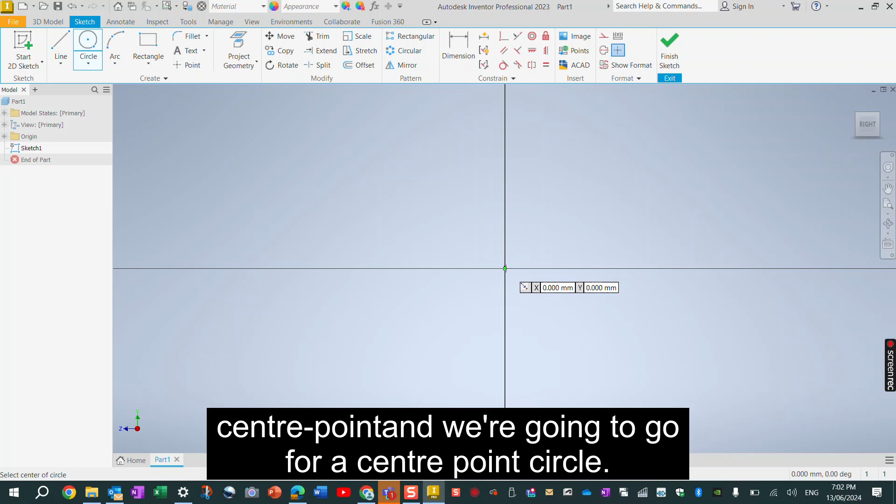Okay, we're going to make the wheels. So new part, standard metric. And then we want to start a new sketch. This time we'll take the right hand side face and we're going to go for a center point circle. So let's go for that.

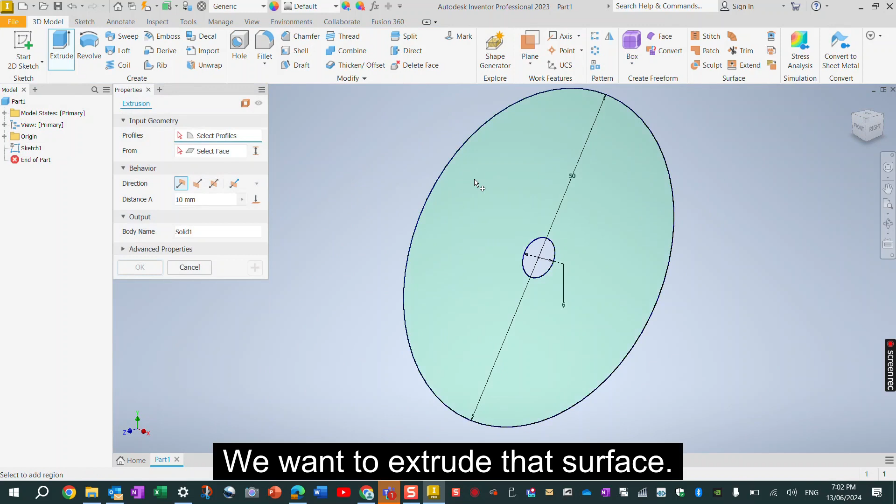They are 50. That's the outside of our wheel. And we've still got the circle function, so we can do another one. That's 6, and that's for our axle. So let's extrude that. And we want to extrude that surface. We've got two surfaces here. So we'll just extrude that one because that's just going to be a hole.

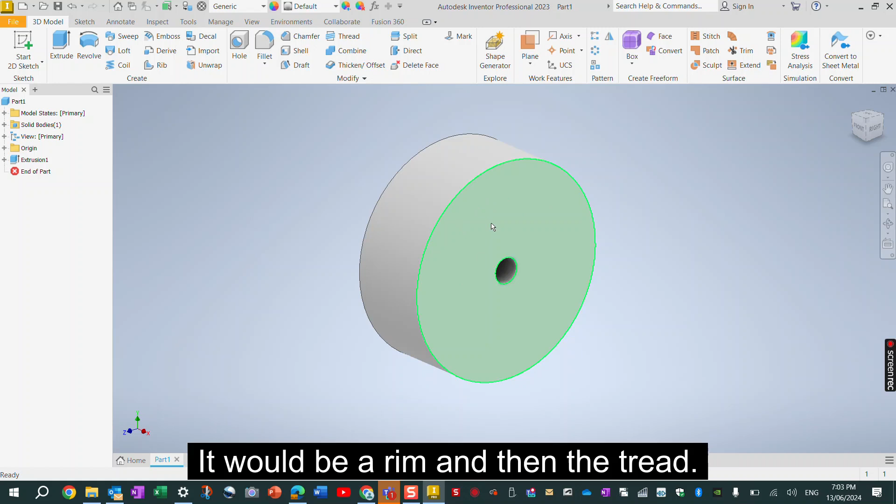And they are 19 millimeters. Okay. So that is our wheel. Now I do want to put a rim on this side. So it would be a rim and then the tread. So let's start that. Start a sketch on that face.

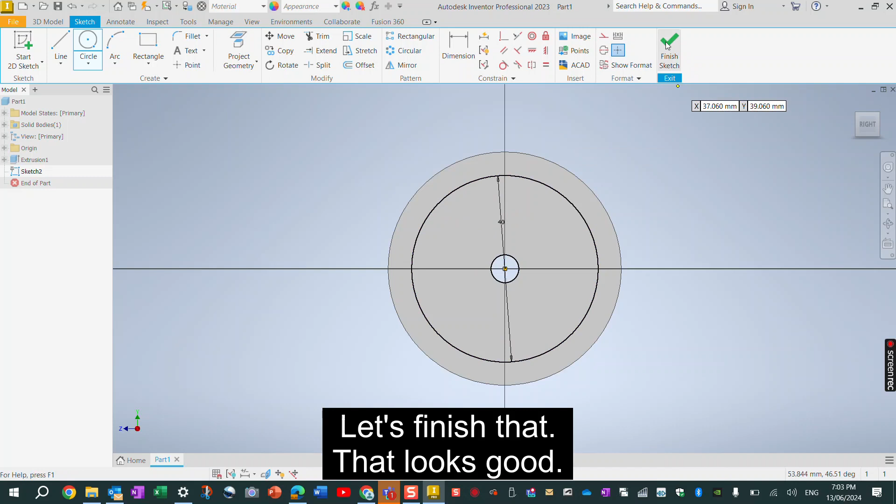We want to do a circle to represent our rims. Let's make a low profile. Let's go 40. So that's going to look quite good. Let's finish that. That looks good. So now what we want to do is recess that in. So we press extrude, and this is the extrude direction. That is the other way.

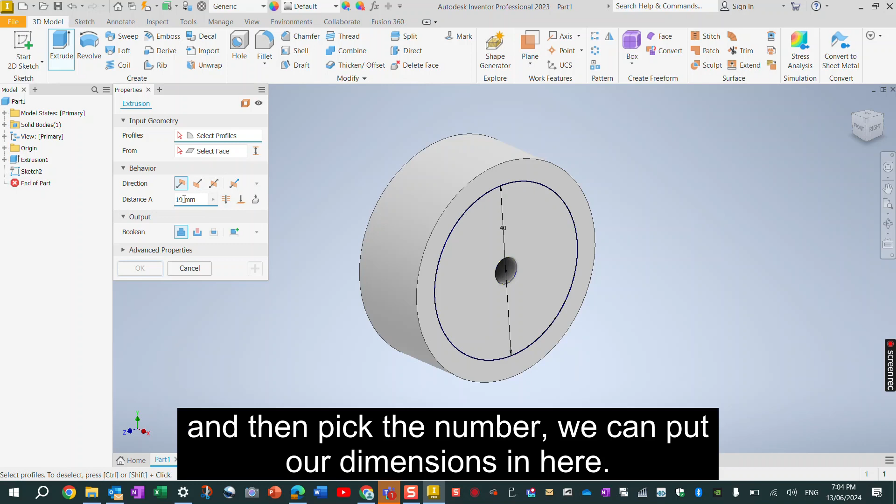And what we can do, rather than extrude and then pick the number, we can put our dimensions in here. So I want to go 2 millimeters inside on that surface. Now that looks pretty cool. What does it look like on the other side? Let's do the same on that.

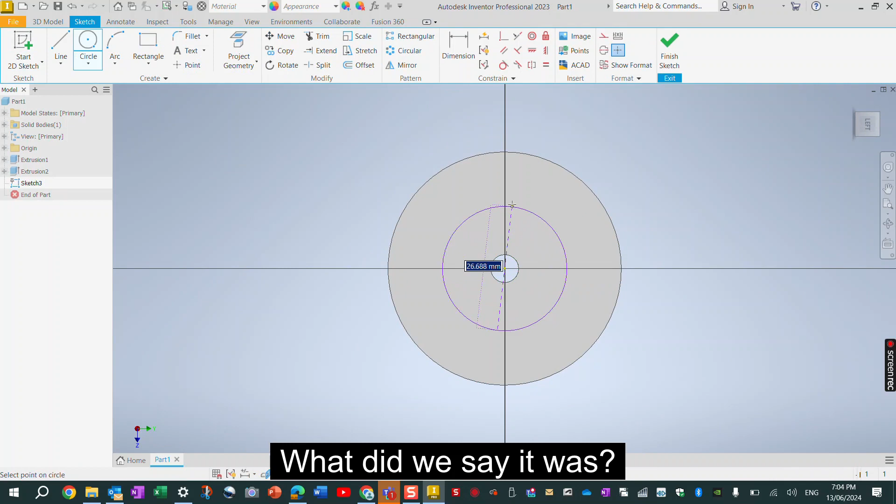Start sketch on that surface. Let's do a circle. What did we say it was? 40. That's going to look good. Finish that sketch. Let's extrude that again, but recess 2 millimeters. And that's already done it for us. Thank you very much. So that's our wheel.

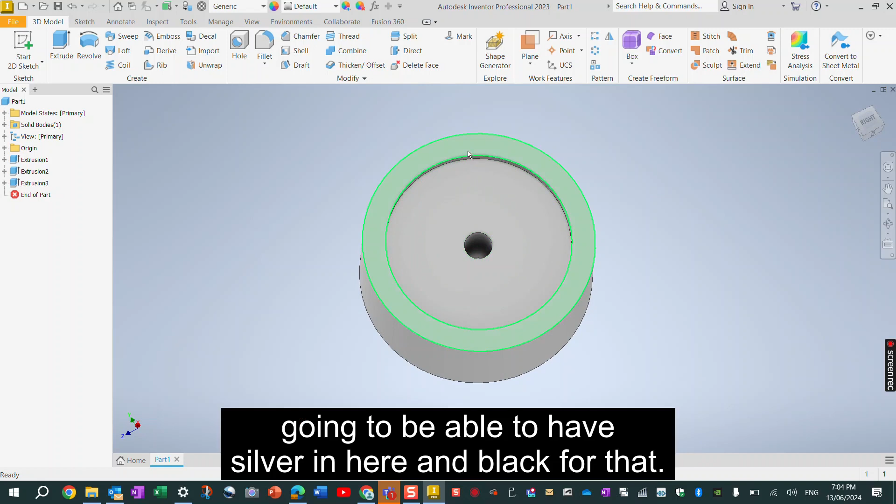That looks good. That's going to be nice because we're going to be able to have silver in here and black for that. The only thing I want to do now is put a fillet, a small fillet on this edge to represent what it looks like on a real tire. So that is our wheel.

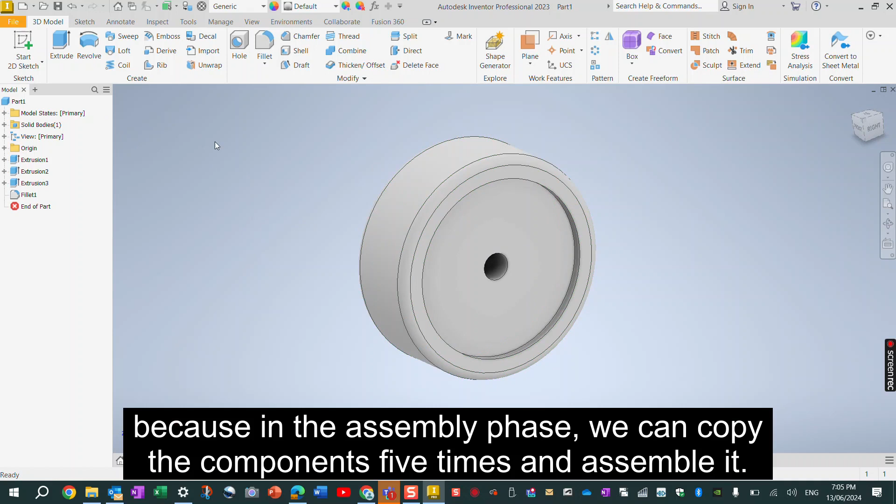And like our bumper bars, we only need to make one because in the assembly phase, we can copy the components 5 times and assemble it. So let's save that as our wheel.